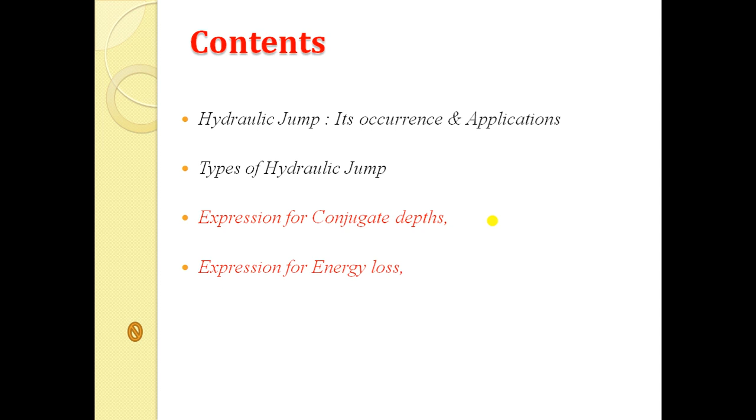Let us recall hydraulic jump. Hydraulic jump may be defined as a phenomenon wherein a supercritical flow gets converted into subcritical flow, and during the process there is a distinct rise in the water surface elevation. Here you can see the supercritical flow is getting converted into subcritical flow and there is a distinct rise in water surface.

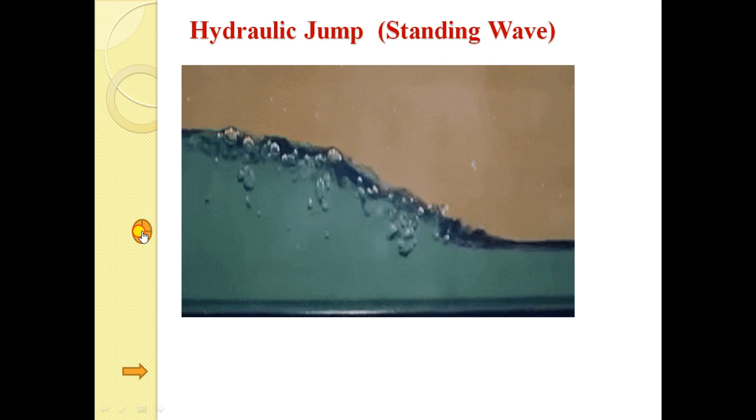The kinetic energy of supercritical flow is converted into potential energy of subcritical flow, and during the process there is a loss of energy. The loss of energy is due to the turbulence due to eddies which are created in a hydraulic jump. In order to study the conditions of flow before and after the hydraulic jump, mere application of the energy conservation equation does not give a complete solution.

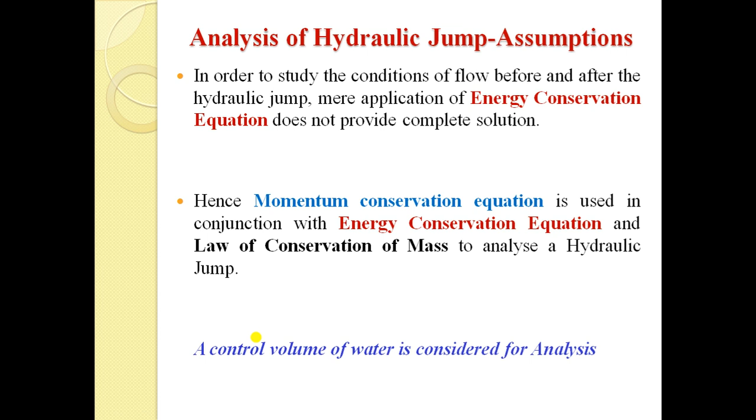We all know that in a hydraulic jump, the kinetic energy of supercritical flow is getting converted into potential energy of subcritical flow, and there is also loss of energy. But just by applying the law of conservation of energy, we cannot find a complete solution to the fluid flow phenomena. Hence, we need to use the momentum conservation equation along with the energy conservation equation and the law of conservation of mass in order to analyze a hydraulic jump. So while analyzing a hydraulic jump, a control volume of fluid is considered.

The following assumptions are made in the analysis of hydraulic jump. The loss of head due to friction at the walls and at the channel bed is negligible. The channel surfaces, be it at the bottom or at the side, are rough. So obviously due to the rough surfaces, when water is flowing, there will be friction and there will be loss of head. This loss of head due to friction at the walls as well as the channel bottom is neglected here.

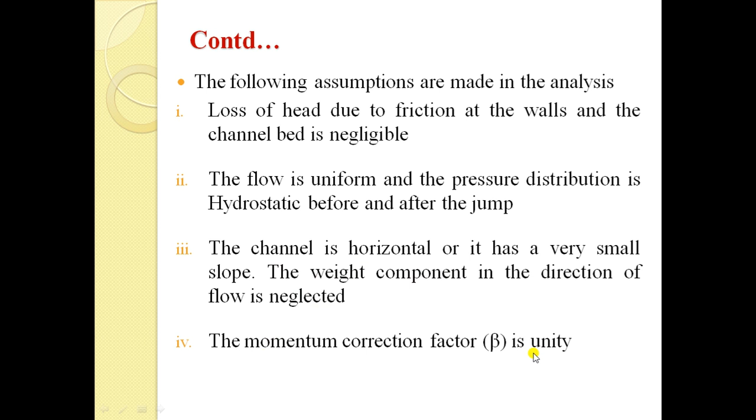We will be assuming the flow to be uniform and the pressure distribution to be hydrostatic before and after the jump. We will be assuming the channel to have a very small slope, or we will be assuming the channel to be horizontal. If we assume the channel to be horizontal, the weight component in the direction of flow can be neglected. And the last assumption is the momentum correction factor beta, we will be considering it to be unity.

Now coming to height of jump. Height of jump, we will be denoting it as Hj. Height of jump is nothing but the difference in the free surface levels before and after the jump. Consider a hydraulic jump formed in a prismatic channel. So here we are considering a rectangular channel.

Consider a hydraulic jump which is formed in a prismatic channel, which is a rectangular channel with a horizontal floor, that is the bed slope is 0, and let us assume it to carry a discharge Q as shown in the figure. Y1 is the depth of flow at section 1-1, V1 is the velocity of flow at section 1-1, P1 is the hydrostatic pressure at section 1-1. Y2, V2 and P2 are the corresponding values at section 2-2.

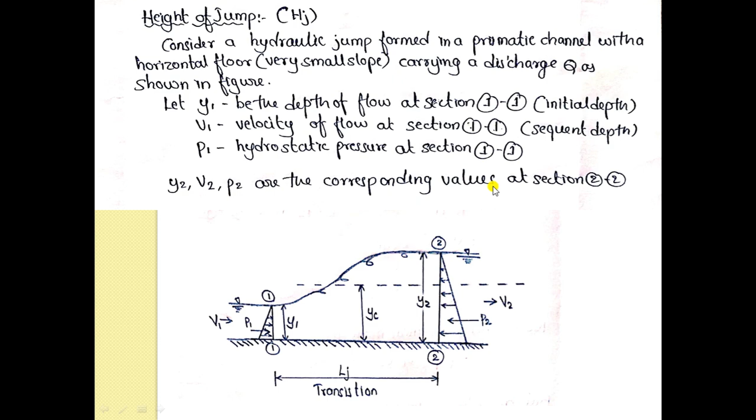Now let us consider the continuity equation. Q is given by A1 V1 is equal to A2 V2. Since this is a rectangular channel, A1 will be given by B into Y1 and A2 will be given by B into Y2. Now as I have said, this is a prismatic channel, so the section will remain the same. So Q by B is equal to y1 v1 is equal to y2 v2.

Q by B is nothing but discharge per unit width. So we can say the discharge per unit width, small q, is equal to v1 y1 is equal to v2 y2. Let us denote this as equation 1. We can rewrite this equation for velocity of flow. So velocity of flow at section 1, v1, is equal to q divided by y1 and v2 is equal to q divided by y2.

Now in case of hydrostatic pressure distribution, the pressure force is given by the formula P = ωAȳ, where ȳ is the vertical depth of the centroid of the wetted area from the liquid surface. In this case, since it is a rectangular section, ȳ will be half the depth of flow at that particular section.

So the pressure force at section 1, denoting it as P1, will be equal to ω times the area, which is y1 into 1, times ȳ, which is y1 by 2. So if you simplify, P1 will be ω y1² by 2. Likewise, the pressure force at section 2 will be ω y2² divided by 2.

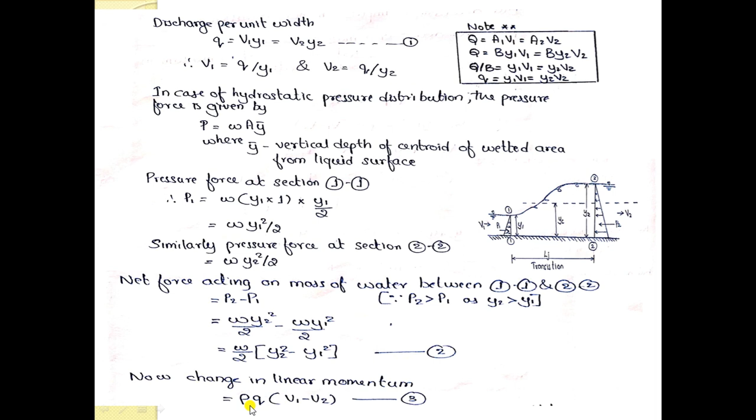Now the change in linear momentum is given by ρq into the bracket (v1 minus v2). So this is mass and this is change in velocity. Let us denote this as equation 3.

Now if you recall Newton's second law, F is given by mass into acceleration, F = ma. Acceleration we can rewrite as dv/dt, that is change in velocity with respect to time. So rewriting, F dt is equal to m dv, and m dv I can write as d(mv), which is nothing but change in momentum.

So this equation F dt = d(mv) is the impulse momentum equation, which says the impulse of a force acting on a mass of fluid flowing with a velocity v over a short interval of time dt will be equal to the change in momentum. So according to the impulse momentum equation, the net force acting on the control volume of fluid will be equal to the change in momentum. Now we need to equate equations 2 and 3.

So P2 minus P1 will be equal to ρq (v1 minus v2) into 1. So ω/2 (y2² minus y1²), which is the value of P2 minus P1, and I am writing ρq (v1 minus v2) as it is. But in place of v1 and v2, let us substitute q/y1 for v1 and q/y2 for v2.

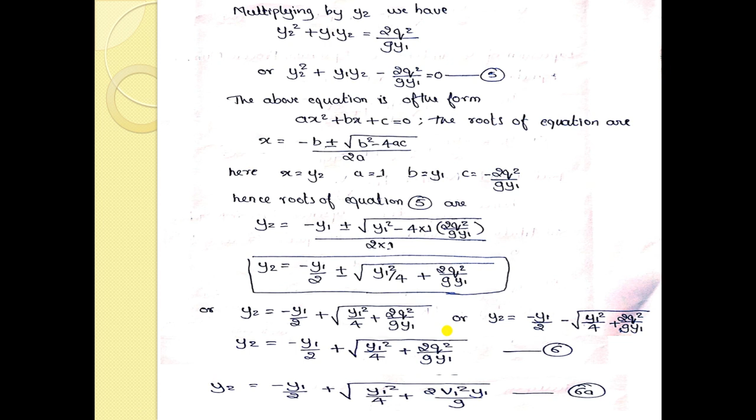Now, we can express y2 in terms of upstream Froude number. Since we will be knowing the velocity of flow at section 1,1 and we also know the depth, if we know v1 and y1, we can find the Froude number at section 1,1. So we can express y2 in terms of upstream Froude number.

So equation 6a we can rewrite as y2 is equals to minus y1 by 2 plus under root of y1 square by 4. Here I have taken y1 square by 4 common. So if we simplify, I will be getting y2 is equals to minus y1 by 2 plus under root of y1 square by 4, which is common, and in the bracket I will be having 1 plus 8 v1 square by g y1. Or, let me take y1 square by 4 outside. When it comes out of the root, it is y1 by 2. So y2 is equals to minus y1 by 2 plus y1 by 2 under root of 1 plus 8 v1 square by g y1.

But what is Froude's number? Froude's number Fr is equals to v by under root of gy. Hence v1 by under root of g y1 will be Fr1. Here it is v1 square by g y1, so this becomes Fr1 square. So if we substitute that value, we will be getting this final equation: y2 is equals to minus y1 by 2 plus y1 by 2 under root of 1 plus 8 Fr1 square, where Fr1 is the Froude number at section 1.

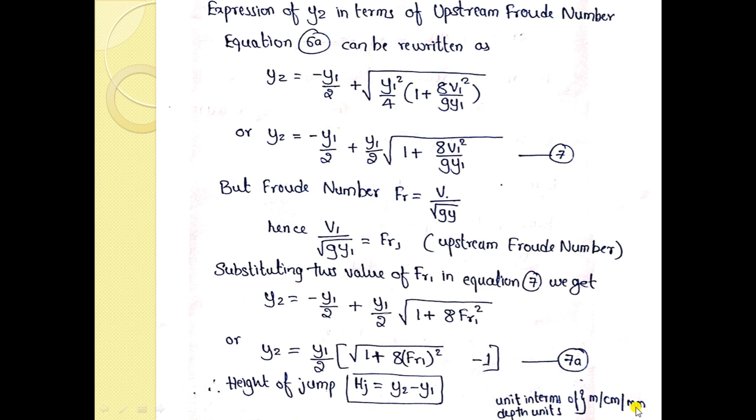So this is the final equation. And here also obviously the height of the jump hj is equal to the difference in free surface levels. So since this is the difference in free surface levels or depth, hence the unit will be either in meters, centimeters or millimeters.

Now, I have been saying that during a hydraulic jump there is a loss of energy. The kinetic energy of supercritical flow is getting converted into potential energy of subcritical flow, and during this process there is a loss of energy. So let us find the loss of energy. The loss of energy due to hydraulic jump is given by the difference in specific energy at section 1 and 2, which is nothing but the specific energy at upstream and downstream.

Obviously here we need to refer to the previous figure. So EL will be specific energy at section 1 minus specific energy at section 2. Let me call this equation 1. So specific energy at section 1, let us write it as y1 plus v1 square by 2g, which is the equation of specific energy at section 1. Likewise, specific energy at section 2 will be y2 plus v2 square divided by 2g.

Now let us rearrange the terms. The velocities have been arranged on one side and the difference in depth on the other side. So v1 I can write as q by y1. So let me substitute the value of v1. If you simplify the above equation, it will be q square divided by 2g y1 square minus, in place of v2 it is q by y2. So v2 square by 2g will be q square divided by 2g y2 square, and these two terms will be as it is. So q square by 2g we can take common, so we will be left with 1 by y1 square minus 1 by y2 square, and y2 minus y1 we will be writing as it is.

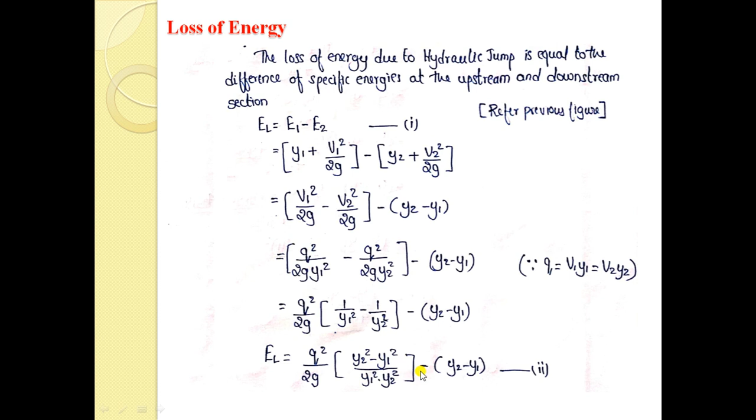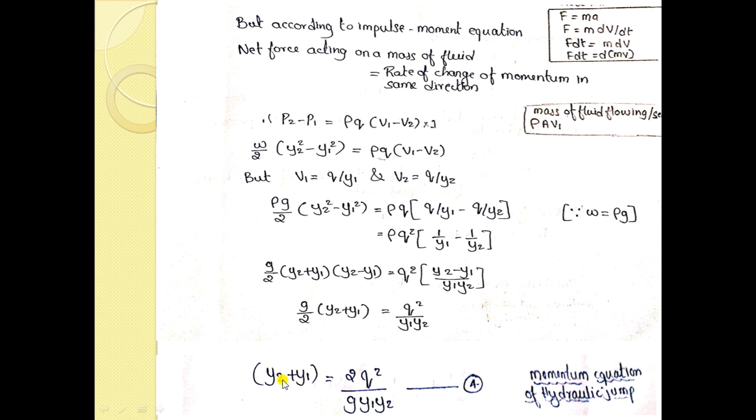Now the loss of energy EL is equal to q square by 2g. Here we can take y1 square y2 square as a common denominator. So if we simplify, we will be getting y2 square minus y1 square, minus y2 minus y1 will be as it is. But if you remember the previous equation 4, that is the momentum equation of hydraulic jump, this is the equation. So y2 plus y1 is equal to 2q square divided by g y1 y2. If you simplify for q square, it will be g y1 y2 in the bracket y2 plus y1 by 2.

Let us substitute the value of q square in the previous equation here. So loss of energy will be equal to, in place of q square we are writing g y1 y2 in the bracket y2 plus y1, and the other terms as it is. So in this equation we can take y2 plus y1 common, and if we simplify, y2 plus y1 as it is, so y2 square minus y1 square I can write as y2 plus y1 in the bracket y2 minus y1 divided by 4 y1 y2, and this term will be as it is.

Now if we take y2 minus y1 common, here I will be left with y2 plus y1 whole square divided by 4 y1 y2 minus 1. If we take common denominator 4 y1 y2, the numerator will be y2 plus y1 the whole square minus 4 y1 y2, and if we simplify we will be getting this as y2 minus y1 the whole square, and y2 minus y1 the whole square into y2 minus y1 will be y2 minus y1 the whole cube. The denominator term 4 y1 y2 will be as it is. Hence the equation for energy loss will be y2 minus y1 the whole cube divided by 4 y1 y2. So this is the equation for energy loss.

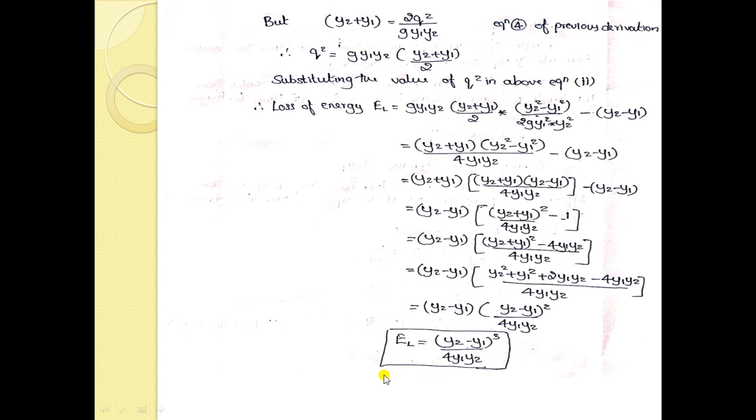I have been referring to these 4 books: Fluid Mechanics and Hydraulic Machines by Dr. R.K. Rajput, R.K. Bansal, Fluid Mechanics and Hydraulic Machines: Problems and Solutions by Subramanya K, and Fluid Mechanics and Hydraulic Machines by P. N. Modi and S. M. Seth.